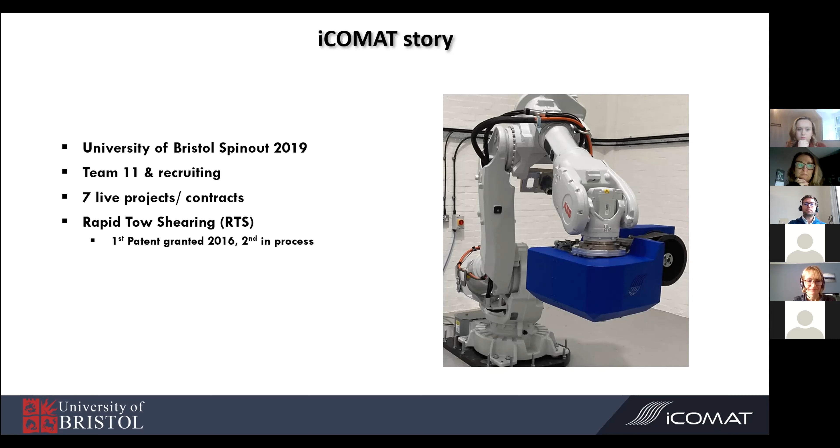The aerospace and automotive industries are really facing a lot of pressure to get the weight out of structures, particularly in aeronautics, where composites are really widespread, as you probably know. But even so, there is a need to get the weight of structures down even further due to economic and environmental pressures.

Composites are used extensively across the airframe, but we're reaching the limit of what can be done with existing technology. So there's a bit of a need for a step change there, and that's where we believe we fit in.

Similarly for automotive, as electrification and autonomous vehicles progress, the weight of the body structure seems to be going up, which is counterproductive. Composites are clearly an answer to this, but there are some really important limitations in terms of cost and rate of existing processes, which means they can't really be adopted for the automotive industry.

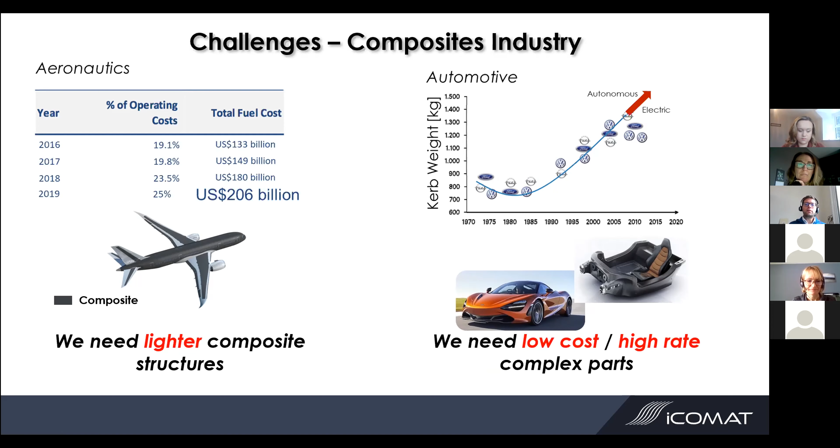So how are composites used at the moment? That's part of the issue. Composites, as you know, are anisotropic, so they're extremely strong in the fiber direction, strong and stiff, not so much in the transverse and through-thickness directions. So the way we use them at the moment is we stack layers of straight fibers to form laminates which have roughly the same properties in every direction.

Whilst this works and it's really good, it's by no means the most optimized way of using composites. So what we're proposing is that if you use fiber steering and curved composites, you can really align the fibers with the load paths in your structure, and that way get the most optimized structure possible.

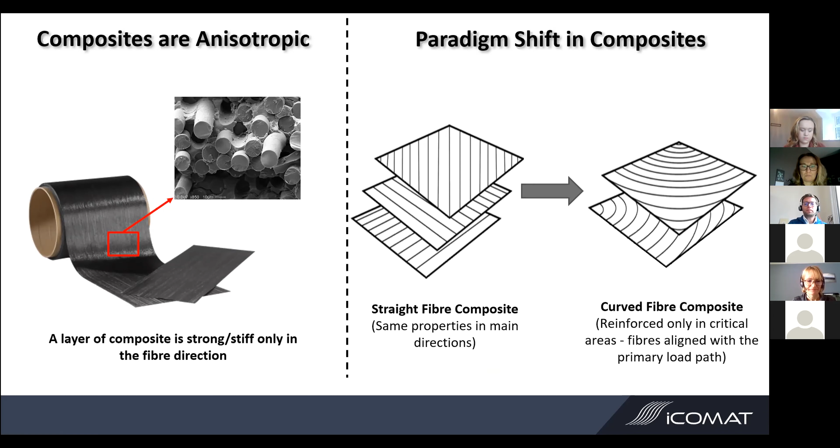Current technology, AFP and ATL, automated fiber placement and automated tape laying machines, are the state of the art, and they're really good at placing fibers quickly in straight lines. They're great at that. However, if we want to utilize the benefits of curved fibers that I just showed you, they're not so great at that.

The way they do it, these machines are normally robot mounted or gantry mounted, and the way they steer is they rotate the placement head to steer the fibers, but this causes bending in the tapes. And with bending comes defects such as wrinkling or buckling, which really have an important knockdown on structural performance.

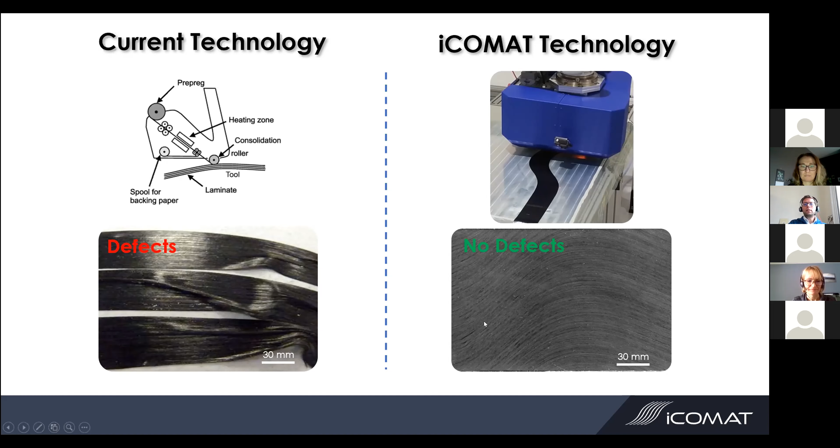Our technology, RTS, rapid tow shearing, is a fundamentally different way of doing things. We apply shear to the tape and not bending, so you can end up with steering without any defects, and it looks a bit like this.

So again, to come back, AFP and ATL bend the tapes, which causes defects. There's also a limitation on the width of the tapes that you can use with AFP and ATL, and the wider the tape, the harder it becomes to steer. This is where the concept of minimum steering radius comes from.

That's traditionally around 500 millimeters to a meter for AFP, and that's the minimum radius that can be steered without defects. As the tape width increases, that minimum steering radius increases as well.

However, with rapid tow shearing, iCOMAT's technology, because it's shearing and not bending the tapes, we are able to steer around really, really tight radii, as low as 50 millimeters. That's an order of magnitude improvement compared to the state of the art.

Another point is, again, because we're shearing, there is no limitation to the width of tape that can be used. Our current machine is set up to work with tapes up to 100 millimeters wide, which is pretty wide for this kind of thing.

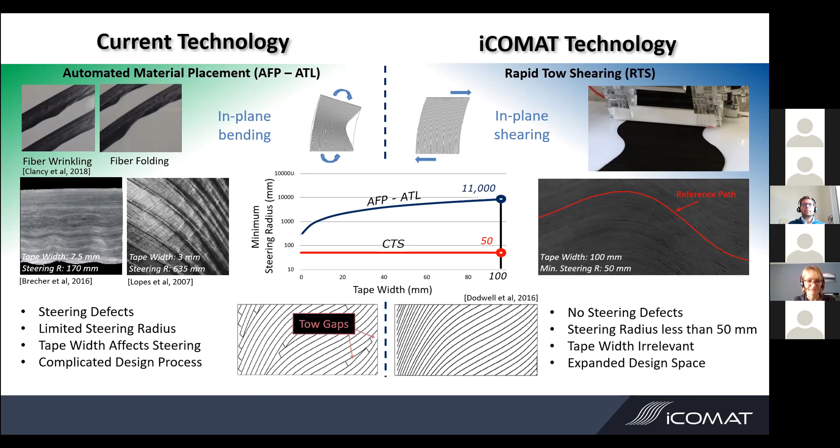So we like to class the benefits into two categories. One is advanced structural efficiency, where we target optimized designs in order to reduce the amount of material needed, typically in the order of 10 to 30%. The other area where we can bring benefits is parts with high geometrical complexity.

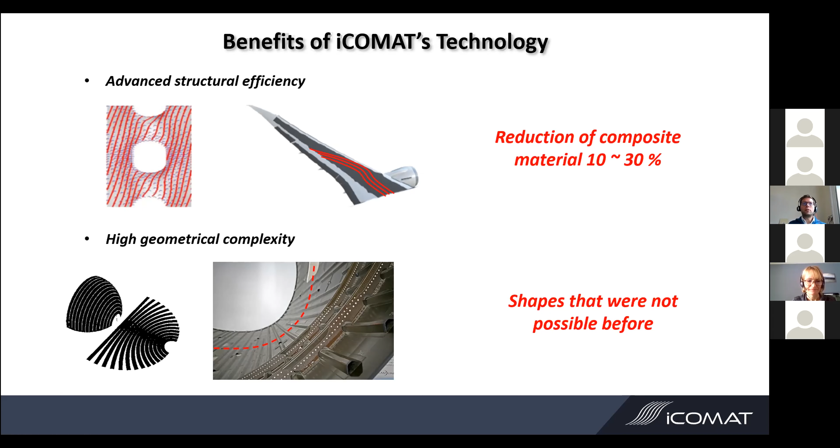To manufacture shapes that were not possible to make with state-of-the-art technology. The example I give here is a really curved fuselage frame, which can be made in theory using tow shearing, whereas the traditional approach might require discontinuities or many segments to be joined together.

Now I'll talk about some more specific applications and improvements. If you look at the right-hand side of the screen, this is a wing cover, and the images here are from an independent study at the University of Bath that looked at how this structure can be optimized for buckling behavior. It was shown that if you enable a really steered design like that, which can be made with CTS or RTS, you can get the weight of the structure down by almost 40%.

And that's because of the minimum steering radius constraints. Whereas with AFP, you could only achieve under 10% weight saving.

On the left-hand side of the screen, this is actually a project running at the moment with Airbus, BAE, and the National Composite Centre, where we're looking at manufacturing a panel with a hole in the middle, or a discontinuity. This could be representative of a lower wing skin with a manhole or access port, or a window frame in a fuselage. What we are doing in this project is showing how we can optimize the structure.

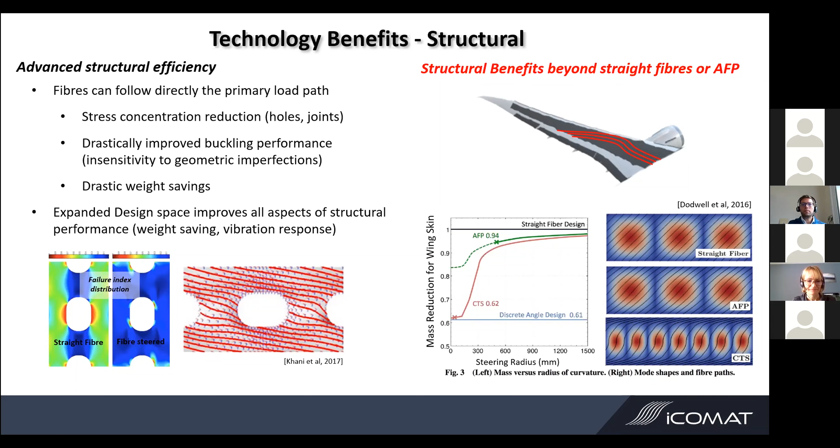Another benefit we can enable is aeroelasticity. So what do I mean by that? Well, to make this kind of aeroelastic design, you really need to be able to tailor the fiber laminate and steer the fibers in-plane. And what's been shown already in the wind tunnel is that the steered design has significant improvements compared to the traditional UD design.

Specifically, it's got significantly lower deflection under load in the wind tunnel, and the optimized design is able to keep the angle of attack constant under load, which has a really drastic improvement on the flight dynamics of the aircraft.

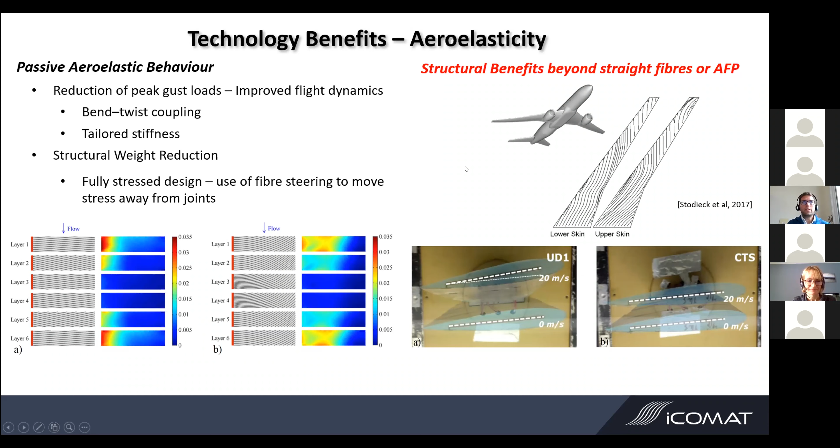Another thing that happens when you steer the fibers and tailor the load paths is that you can more uniformly stress the wing. You can move stress concentrations away from joints, for example, and spread them across the laminate, so you're using more of the composite. This is an area we are currently looking into together with the Ministry of Defence, where we have a contract.

This is a bit of a new application here. We are working with the European Space Agency to look at thin-walled cylindrical shells, which are typical for a launch vehicle. These shells are really sensitive to geometric imperfections and buckling, so the current approach is to stiffen them with T-stringers or similar.

What we are proposing, thanks to this shear-thickness coupling I mentioned earlier, is that if we steer the fibers on this structure, we can get a thickness increase locally, and therefore create integrally stiffened structures. So we can stiffen the structure and make it thicker locally without adding extra material, which is a bit of a new concept. We are about to manufacture one of these cylinders for the European Space Agency, and we'll send it off to be tested.

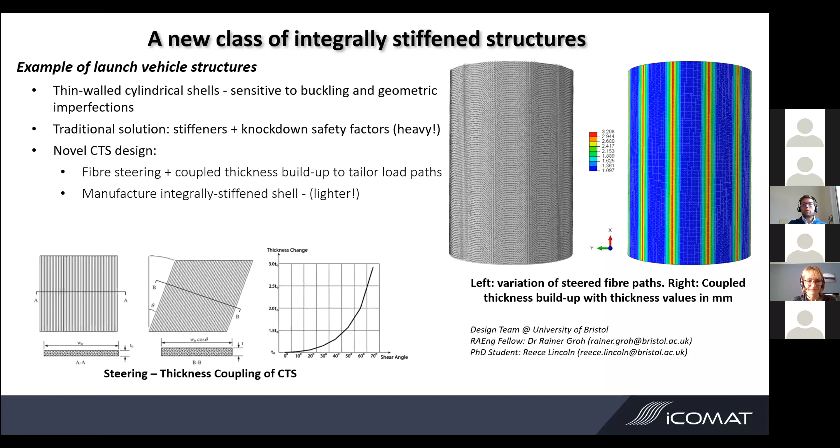So hopefully that's given you an idea of what we can do. I wanted to show you the slides with the industries that we're targeting, and then some of the applications where we think we can bring a benefit. Some of these I've already covered, other ones we're also working on, but by all means we're up for a discussion here. So if you think of anything that's worth looking into, we'd love to hear about that.

So for aerostructures, these curved fuselage frames, also fan blades. Then for automotive, particularly, cars are full of these curved pillars and reinforcements. So that's a really interesting area for us. And then energy, of course.

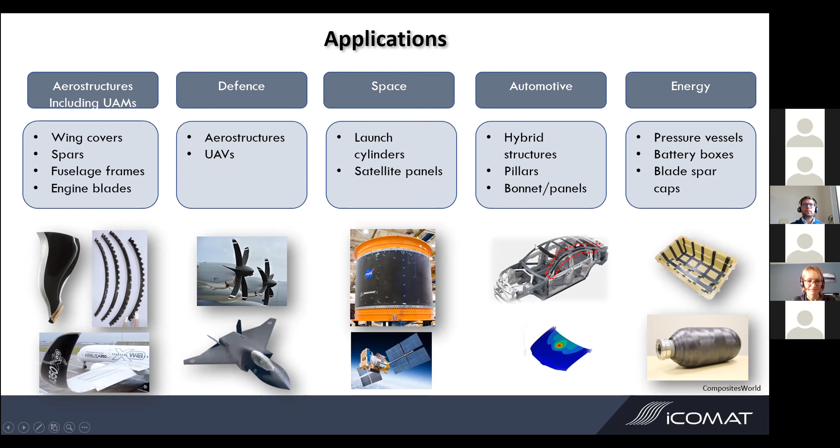So I've left this slide till last because it's an area that I'm really interested in. It's close to my heart, and that is the benefits that we can bring to forming. This started off with an automotive customer a while ago. They came to us and said, 'Can you make this curved beam?' Because when we try to make it from straight fibers and forming, we end up with wrinkles. So that's the first thing we tried, and indeed you do get a lot of wrinkles, as you can imagine.

So we then made an equivalent layup with curved fibers and formed it using diaphragm forming, and the results were vastly improved. You can see in the picture that there were pretty much no wrinkles on that part. That was 8 plies of 0/90. And that's really prompted us to look into rapid tow shearing and forming as a way of

delivering a means to make 3D structures from 2D blanks. So we're currently scoping a project together with Solvay, where we hope to use their double diaphragm forming line, which is a fully automated forming line that they have, to make an end-to-end demonstration. So we'd start at one end with a flat blank, and at the other end we'd have a fully formed, fully cured component.

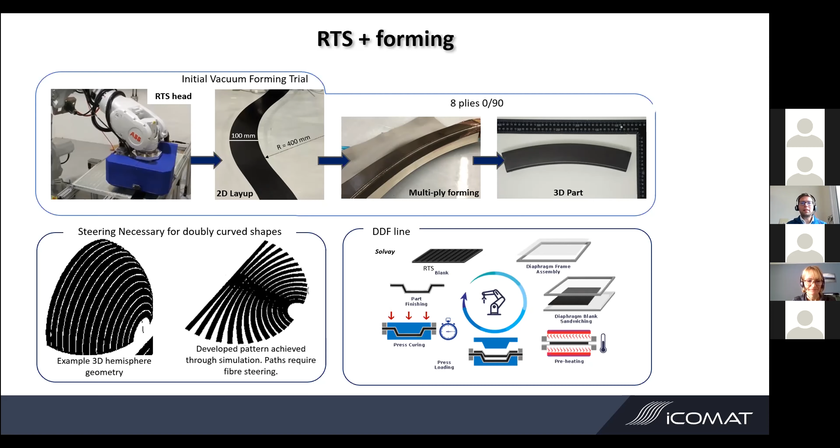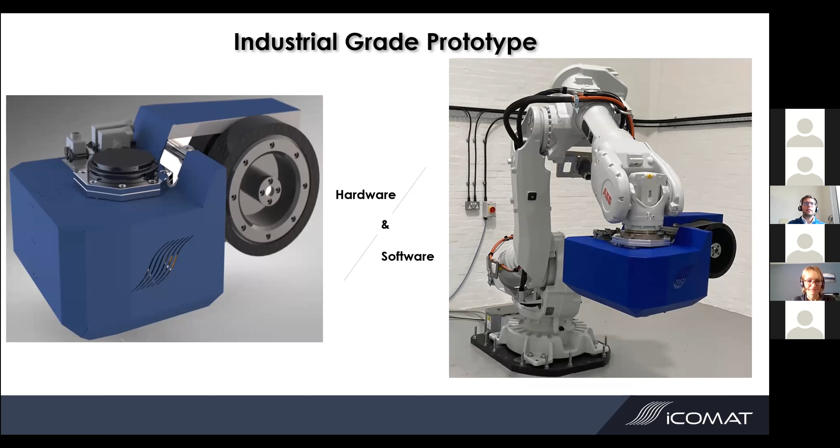I wanted to show you this picture of our current prototype. This is the alpha version of the head, and it is in our Bristol facility, and it's really starting to look like a proper industrial machine, and we're really proud of that. I wanted to show you a video as well of the machine in action. Hopefully it's smooth, not too jumpy.

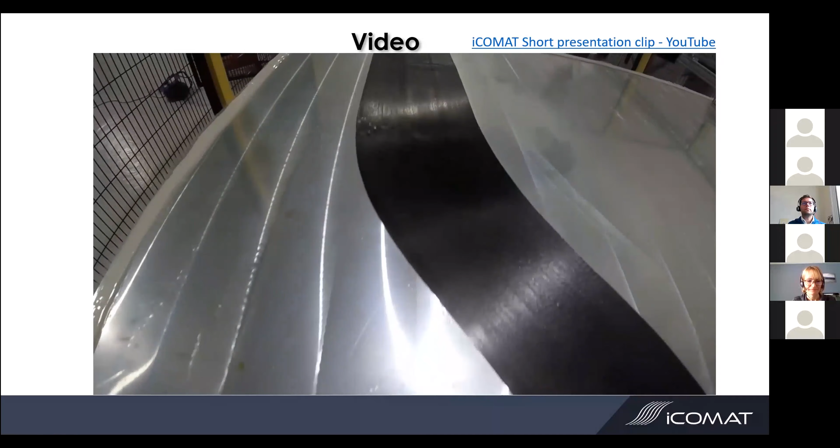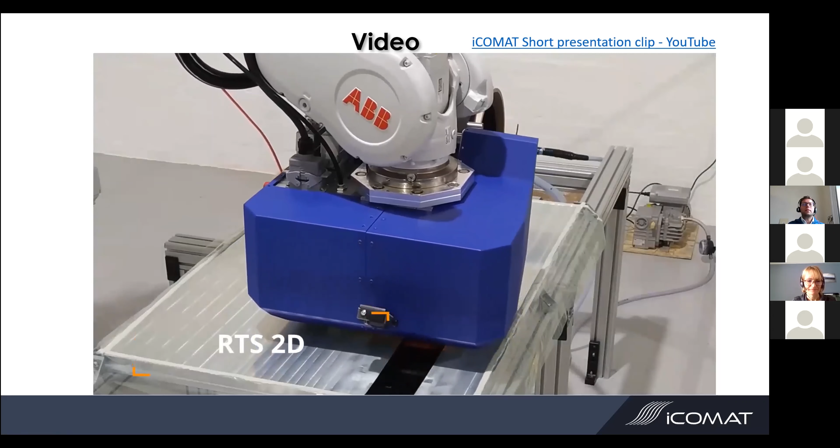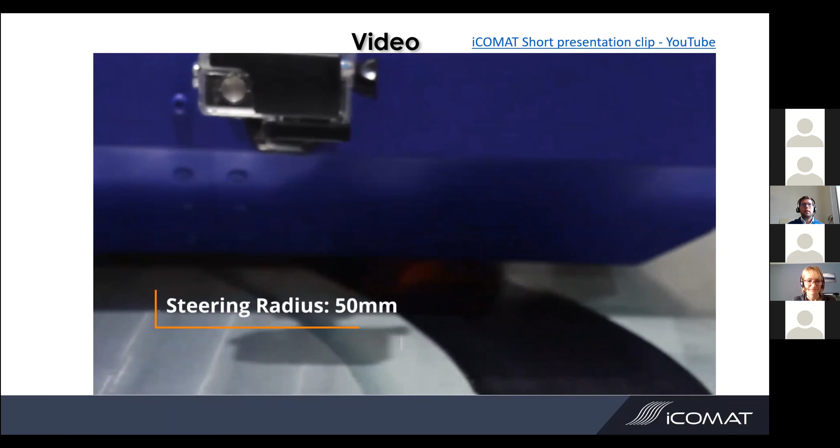I'll play that again and talk over it, if that's okay. So here we are, this is a real-time video. We're depositing at around 0.3 meters per second, and we're using 100mm wide tape. This is just a generic geometry to show off our capabilities, and yeah, it looks really good. It's got a minimum steering radius of 50mm, I think, and a maximum shear angle of around 30 or 40 degrees.

And just wanted to finish with some close-ups of the paths that we lay up. Really, they look really good, and no defects are observable.

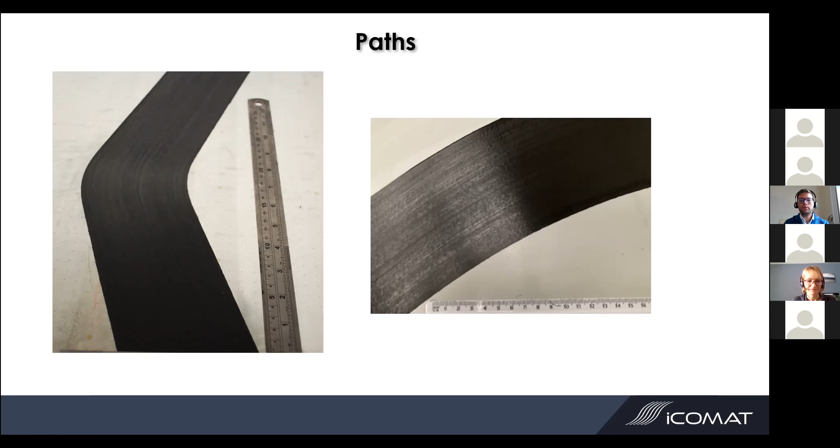That's great. Thank you for that presentation, Dominic. That was really interesting. Anyone has got any questions, please feel free to ask them. And I'm sure Dominic will try and answer them.

Can I start off with what I hope should be a relatively simple question to answer? I've always been fascinated by this, but there's something in my mind that tells me you can't continuously keep on steering a tow round and round in a circle if it's coming from a continuous tape. Do you have to have some sort of balance between left steer and right steer in each continuous length?

That's a good question, but you're absolutely right, we can't do a continuous circle. A lot of people have asked that, and there's some fairly fundamental reasons why that won't work. But to ask about the balance of left steer and right steer, it may be better if we take that offline, and I can get some input from the technical team to support on that.